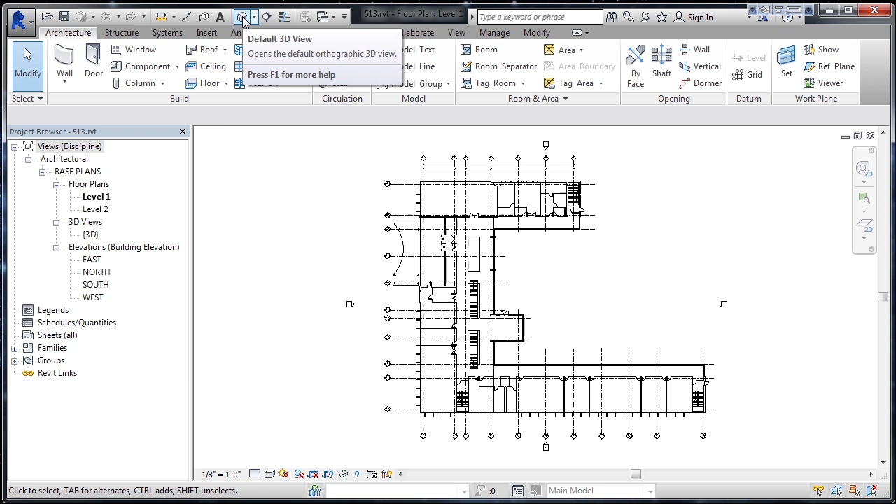And I can see in my default 3D view, I have two flat 2D floor plans, if you will, that are referenced in. And if I had a third floor, a fourth floor, or a roof, or a basement, I could bring those in and associate those to the appropriate level. Well, the next step is to actually bring in the elevations, the north, the south, east, west, or front, back, left, and right, depending on your terminology.

To do that, we'll want to go to the elevation for which we're bringing in that 2D CAD file. Let's go to the north elevation. So in your project browser on the left, double-click North. Now, the first thing we need to tell Revit is what plane we want to bring this elevation in on. So in a previous lesson, we created grid lines associated to the grids that were in the 2D CAD files we linked in. Well, we want to tell Revit now which grid we want to place this elevation on.

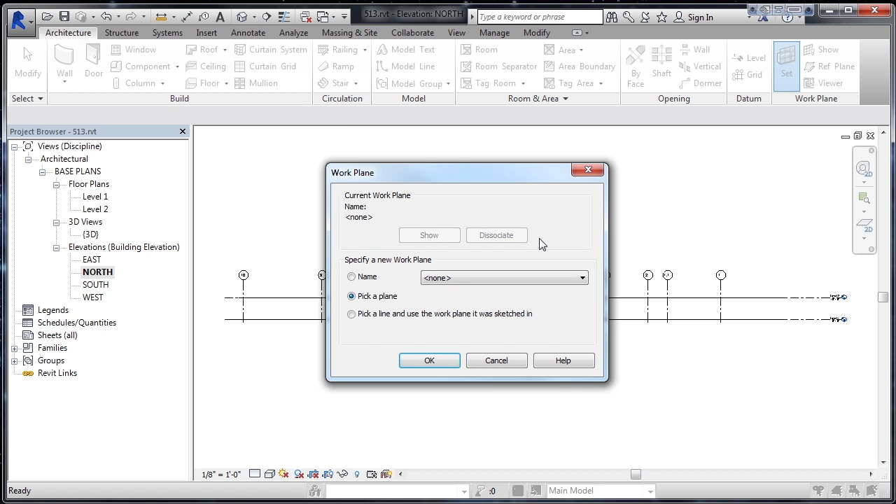To do that, go to the Architecture tab, and all the way to the right in the Work Plane panel, click Set. It will now ask us what plane or grid you want to align this to. Click Name, then click the drop-down, and then click Grid A, and then OK. This will be the active work plane. It's associated with Grid A, so the elevation I bring in will sit on that work plane in line with Grid A. Now, if things don't align or you miss a step or something else isn't correctly configured, we can always use the Align tool.

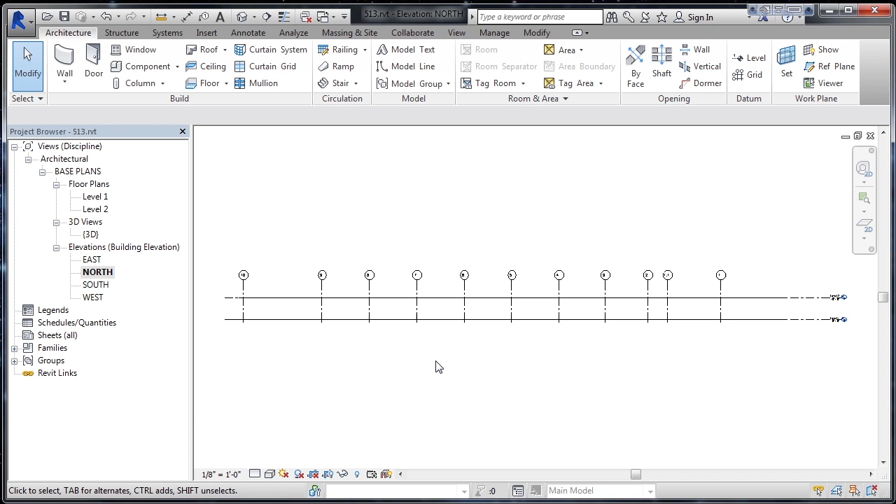Now let's link in the actual north elevation 2D CAD file. So let's go to the Insert tab, click Link CAD, and then browse to the directory of your files for this class. Choose the north elevation or elevation north, and then verify colors are set to black and white. We're going to bring in all the layers, auto detect units, uncheck correct lines. Positioning is auto center to center. We're going to align this at level 1 and orient the view.

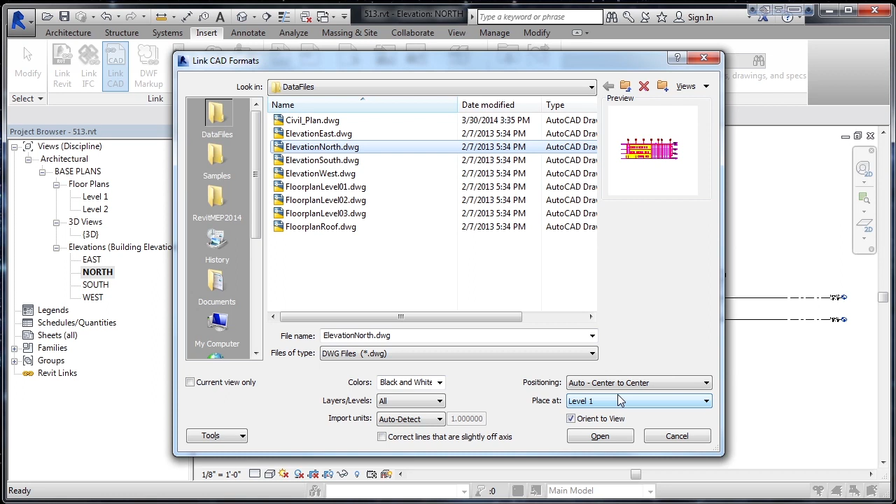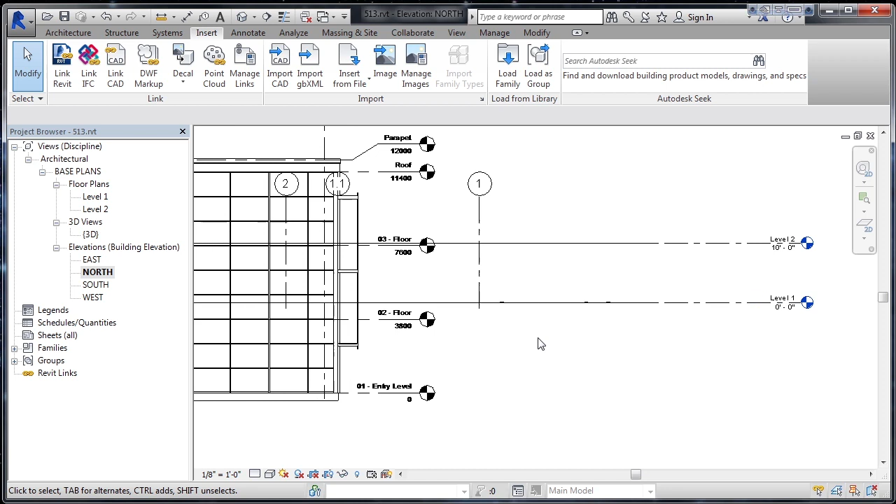Click Open. And what happens now is this 2D elevation view is brought in and placed on the Grid A plane. Now, if something doesn't go right, for example, if we look at my screen and I zoom in, I can see my horizontal levels for floor 1, floor 2, for example, don't quite match what I have in my Revit model. So the first thing I would want to do is align them. So I'm going to align the floor 2 level from the imported elevation with the level 2 level in my Revit file. So to do that, go to the Modify tab on your ribbon.

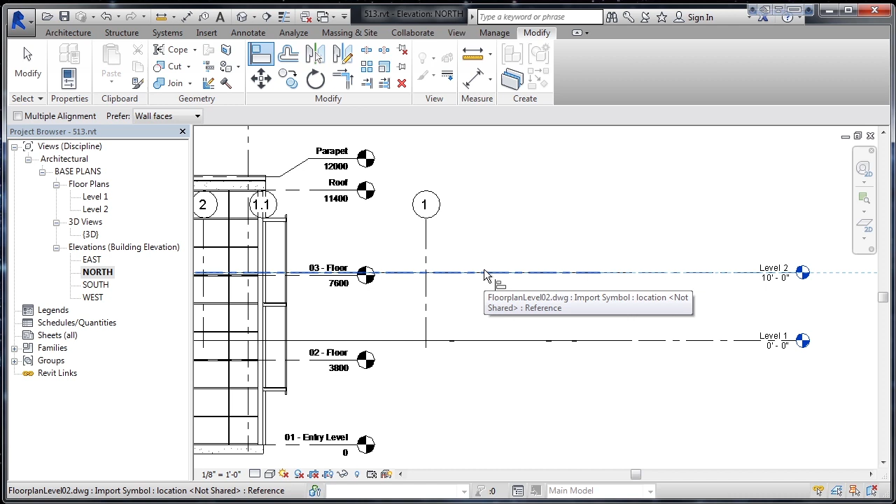Then in the middle in Modify, click Align. The first thing I want to pick is what do I want to align to? Well, I want to align to my level 2 that I created in the Revit project, so I'll click it. Second thing is, what do I need to move or align? In this case, I'll click the level 2 or floor 2 level line from the imported CAD file. And then what it does is it actually aligns those two. Another step that I would want to do for cleanup, and I'm going to kind of omit it for this example, would be to readjust my levels.

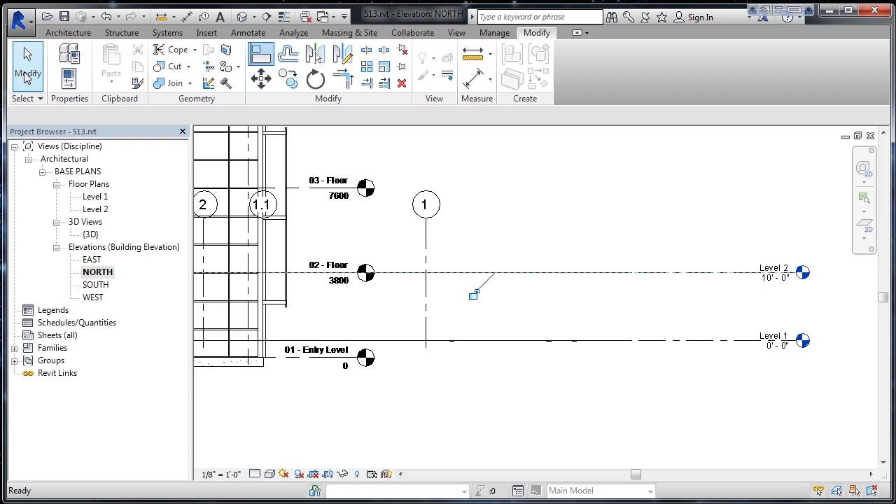So my level 1, I would want to drop down a little bit so it's in line with the entry level that's placed here in the CAD file. Let's look at this in 3D to see exactly where it's placed. But first, let's end the Align tool. Click Modify, and then click the default 3D view.

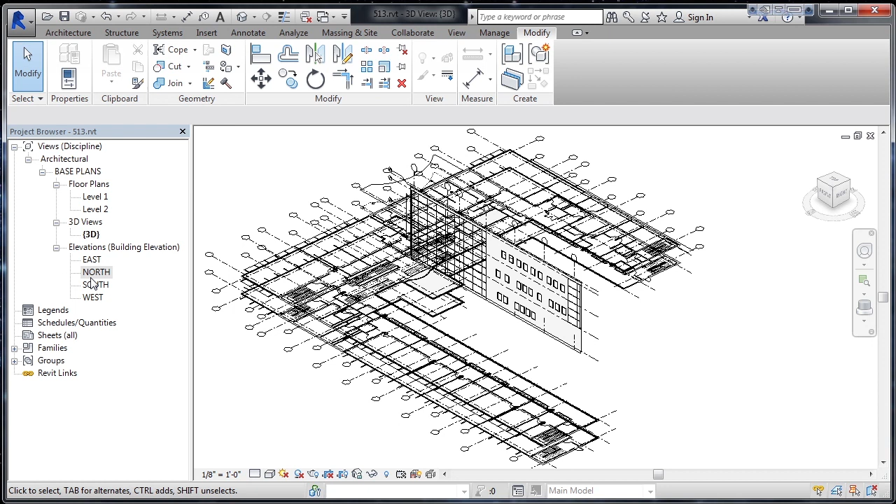Now, I can't do it from the north elevation because I'm looking parallel at the face of the actual elevation. So I'm going to go to one of the other elevations, such as the east elevation. So double-click east, and I can see the vertical line in the middle is that actual elevation I linked in. And it's not aligned to Grid A. Grid A is over here on the right.

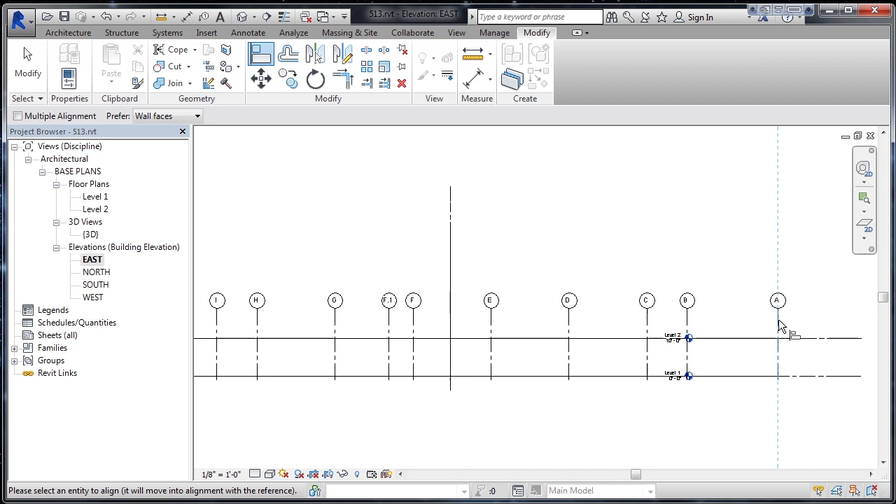So let's use the Align tool again and align the elevation to Grid A. To do that, go to the Modify tab, then go to Align under Modify, and then the first thing is I want to pick what I'm aligning to, in this case Grid A. So select the vertical line by Grid A, then select the vertical line in the middle.

And it doesn't matter which part of this you select, because if you hover over it, it'll show you it's the whole referenced north elevation. And then select it, and it will align that elevation now with Grid A. Click Modify to end the Align tool. And now let's go back to our 3D view again.

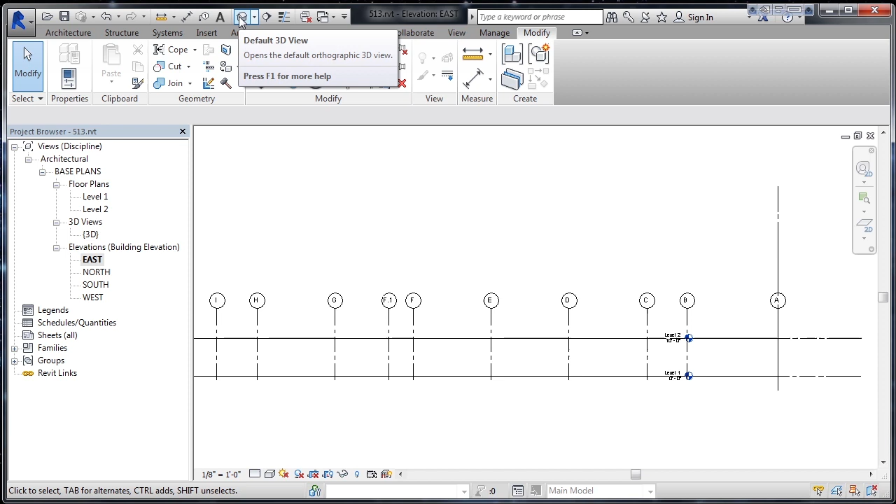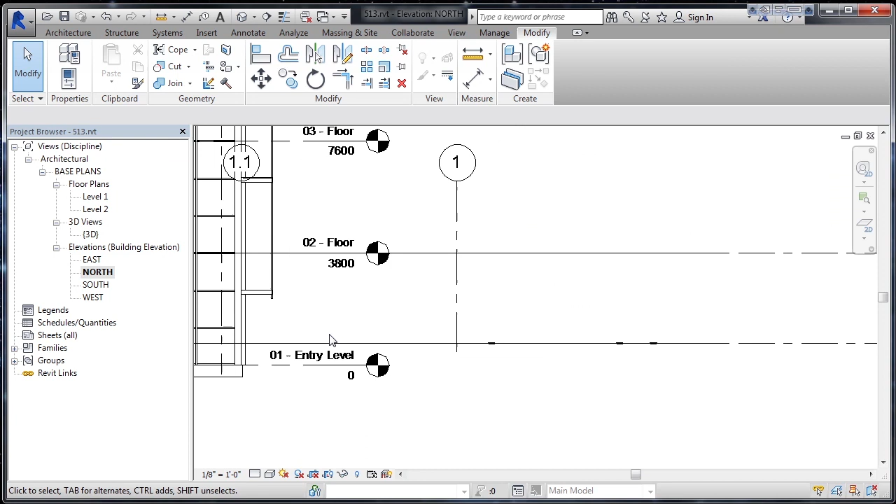Now I can see if I rotate my cube a little bit that I have this now aligned on the right plane, in this case Grid A, but now it's shifted a little bit. So here I can go back to the north elevation. Just double-click north elevation on the left in the project browser, zoom out, and I could see my grid lines don't quite match. So I need to shift this to the right or the left.

So again, I'm going to use my Align tool. Go to Modify, then Align. And the first thing I want to pick is what I'm aligning to. Well, I'm going to select this vertical line represented by Grid 5, or you could pick 6 or 4 or any of the others. But make sure you pick the one that you drew in the drawing, not the one from the imported CAD file. Go ahead and click it.

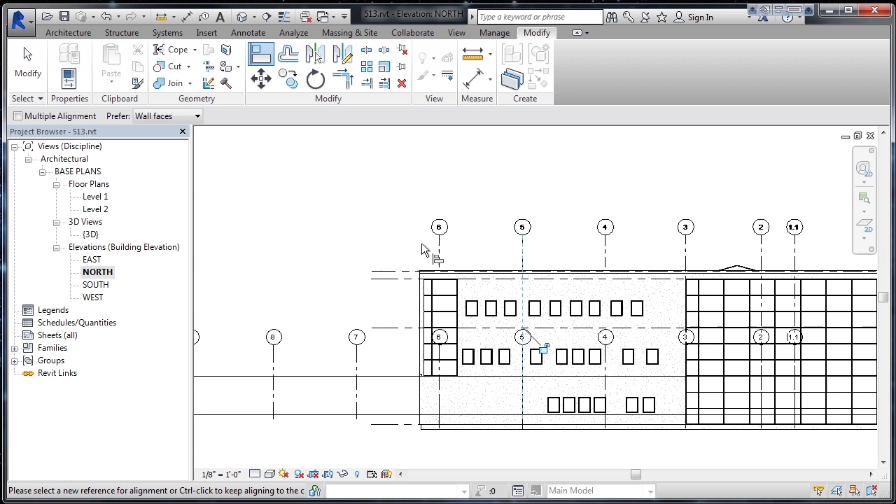Now what I'll do is I'll mouse over the grid line from the imported CAD file, in this case the actual elevation north drawing file that's linked. Go ahead and click it, and the elevation shifts now right or left depending on your view. Click Modify, and finally go ahead and click the default 3D view again. And now I can see this elevation is in line with that side, in this case the north side of the actual building. And then I would start to repeat the process again.

So if I wanted to bring in the south elevation, I would go to the south elevation and then set the actual default plane to the other grid, in this case the letter J on the other side, and then insert in. In this case, we're linking the actual 2D CAD file to our Revit model.

So in summary, what we looked at in this lesson was how to use various CAD files and linking them in, specifically architectural elevations, into our Revit master file. We looked at how to set the current plane, aligning it to a grid that we created from our floor plans that were linked in. And then we used the Link CAD tool to link in our 2D CAD files into our existing Revit master model.